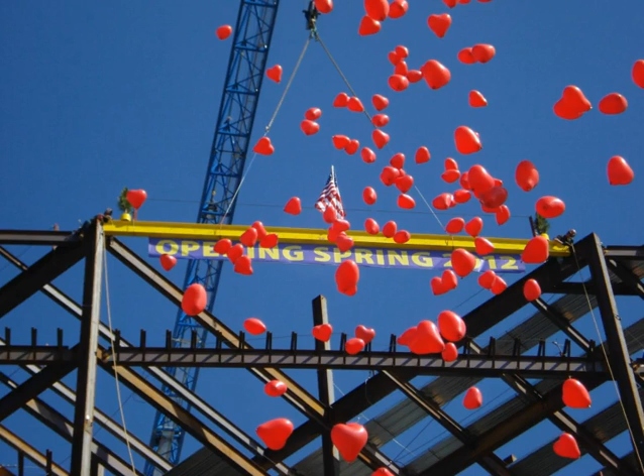This information is vital to your health and safety and to the health and safety of those around you. Robbins & Morton's culture is based on the philosophy that all injuries are preventable and that performing work safely at every project, every day, is key to our long-term success as an organization.

We have a simple goal. We want you to go home every day feeling as fit and as healthy as you did when you came to work, free from injury and illness. Your loved ones are counting on this too, and we don't want to disappoint them.

Robbins & Morton's vision for safety excellence is to provide a safe and healthy work environment for all who are touched by our business, and a culture of safety commitment to each other.

If you ask 100 people what's safety, you will likely get at least that many answers. The goal for Robbins & Morton is to bring everyone to the point of making a personal choice to work safe, because no one comes to work thinking, I'm going to get hurt today.

We don't want you to be safe because you'll get into trouble if you're not. We want you to be safe because it's the right thing to do.

The purpose of this orientation is to set and communicate goals, share the expectations for working on site, share your responsibilities for working on site, discuss the Robbins & Morton culture of safety, review common construction safety hazards and appropriate controls, and help with any questions you may have.

Safety is a value, and that means it won't change. Our commitment to you is that no schedule, profit, or quality issue will take precedence over your safety. You are important.

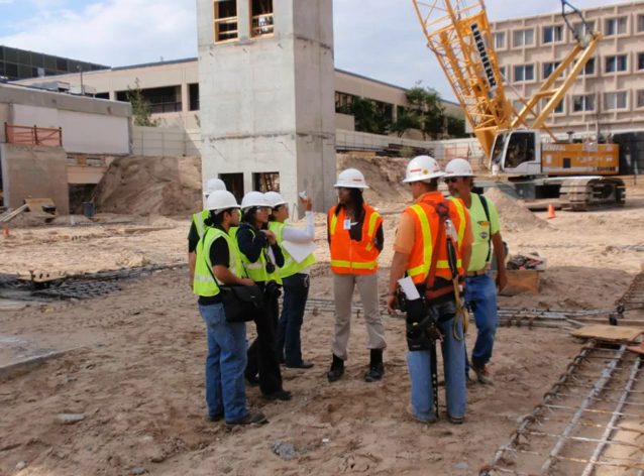Robbins & Morton is committed to maintaining a work environment that is free of harassment. In keeping with this commitment, we will not tolerate harassment of company employees by anyone, including any supervisor, coworker, vendor, supplier, client, or customer of the company.

A few things fair accountability does: it ensures accountability is balanced, ensures there is a consistent, impartial approach, helps make transparent or fair analysis, and encourages coaching and honesty.

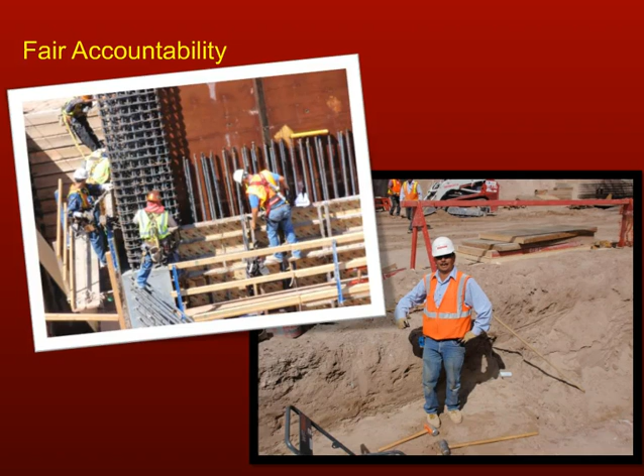Access to the project will be strictly controlled to ensure only those with required training are allowed on site.

12 Seconds to Safety is a safety awareness campaign to further supplement our current pre-task planning process that involves mentally preparing to start a task by asking yourself 12 simple safety questions.

This is not a substitute for a pre-task planning meeting required to be completed for each task. For all Robbins & Morton employees, this process must be completed for each task. Before each task, take a step back and mentally think through the 12 questions on the back of the card.

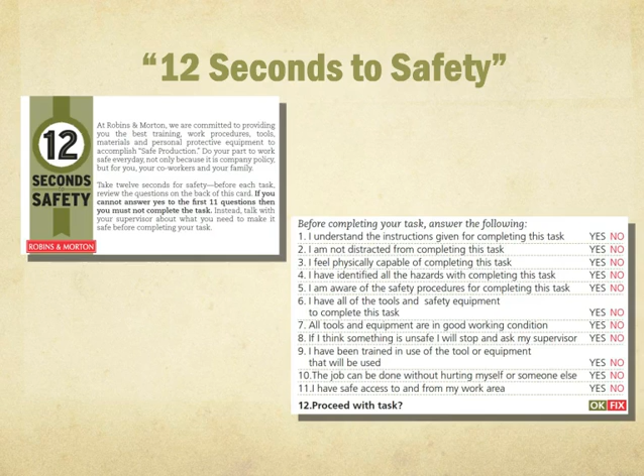Employees who can answer yes to all the questions are adequately prepared to safely complete their assigned task. Employees who answer no or who are unsure about a question must not start the task and should ask their supervisor for further assistance. The purpose of the 12 Seconds to Safety is to encourage employees to think in ways that activate and support safe behavior.

It encourages employees to coach themselves and their coworkers to identify unsafe conditions and exposures, and encourages self-accountability by having employees think about their actions and safety before they start a task.

Minimum PPE requirements are a hard hat worn properly, eye protection, leather or equivalent work boot, 4-inch sleeve t-shirt, work pants, hand protection, and your company's rules dictate if they are more stringent.

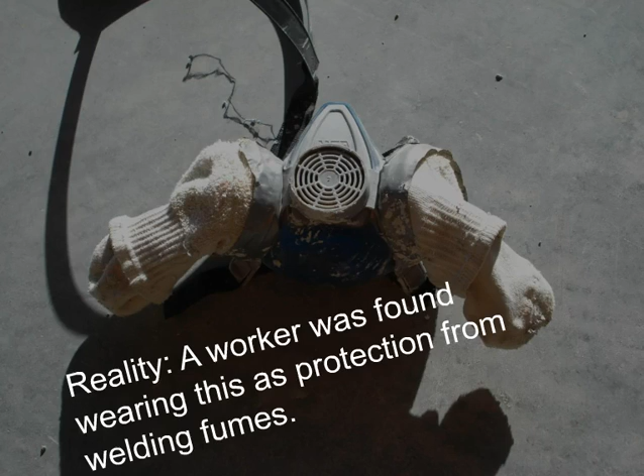Other PPE may be needed: fall protection at or above 6 feet, hearing protection above 85 decibels, respiratory protection, chemical protection, additional eye protection, or reflective vest. Head protection is required throughout the project for everyone.

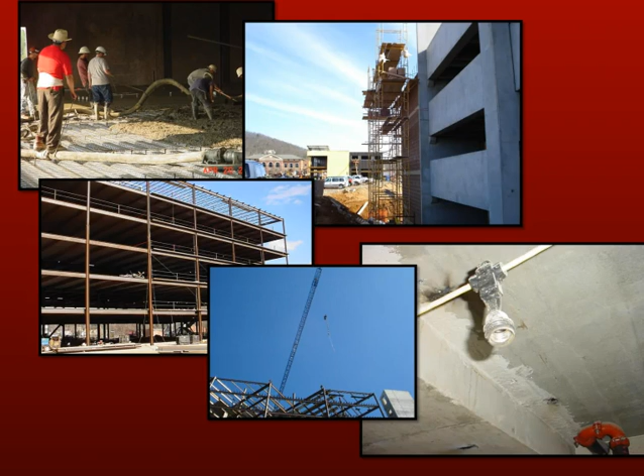Some additional hazards that could cause requirement for head protection are falling objects, overhead work, impact as a result of bumping or striking, electrical work, or flying or swinging debris or objects.

Approved head protection includes both plastic and fiberglass hard hats meeting ANSI Z89.1 standards for Class 2 and 1 only. Metal and cowboy hard hats are not approved. Head protection should be inspected daily for signs of damage and removed from service if found.

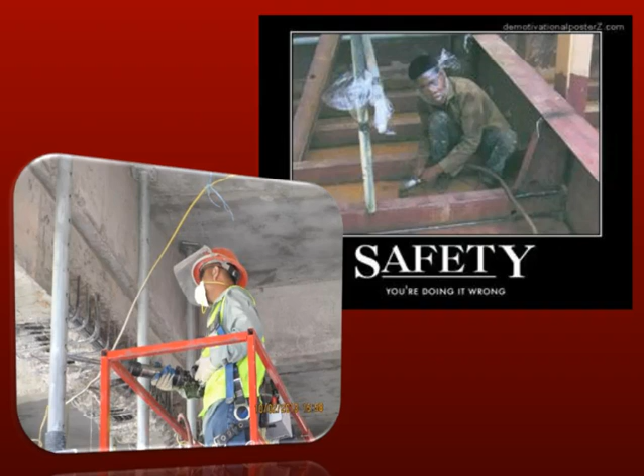Some hazards requiring eye or face protection are grinding, sawing, using power tools, high wind areas, mixing materials, splash hazards, cutting, drilling, overhead demo, or wrecking or stripping forms.

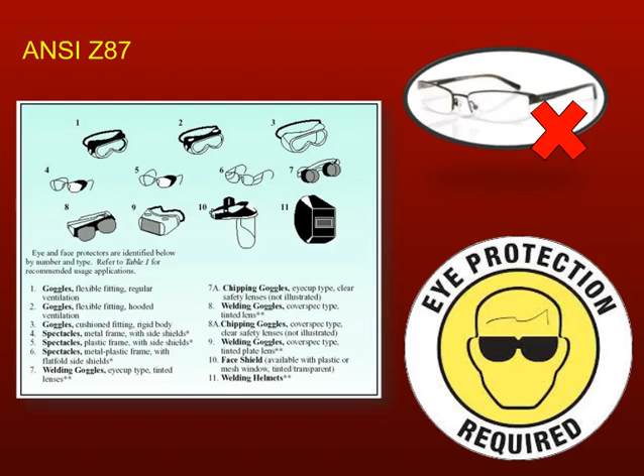Ordinary prescription glasses do not provide the required protection. Proper choices include rated glasses with side shields, rated over glasses, rated goggles with corrective lenses. Face shields are used with safety glasses and must be worn when there is exposure to the face.

If materials jam or get hung up, stop the machine and free the machine under direction of your supervisor. Do not try to catch falling materials. Ensure you provide a good workstation. Never put yourself in the line of fire. Use clamps, vices, or similar means to secure materials.

Avoid handling sharp materials. When it is not possible to reduce the noise or duration, hearing protection must be provided and adequate for the exposure.

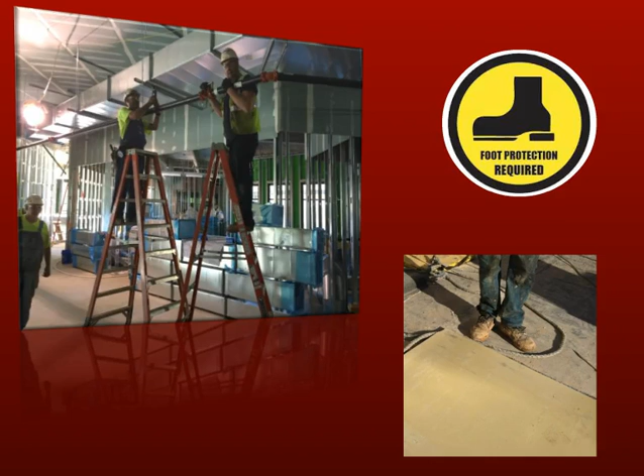Leather or equivalent work boots are required for all workers on this project. Be mindful of hazards when using equipment such as jumping jack tamps, remote-controlled roller compactor, or rigger.

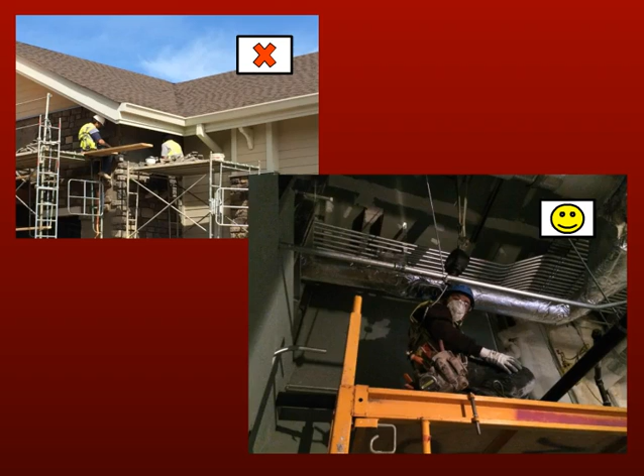Robins & Morton and subcontractors shall comply with the Occupational Safety and Health Administration standards, also known as OSHA, for construction as it relates to fall protection. Exceptions will not be permitted on this project.

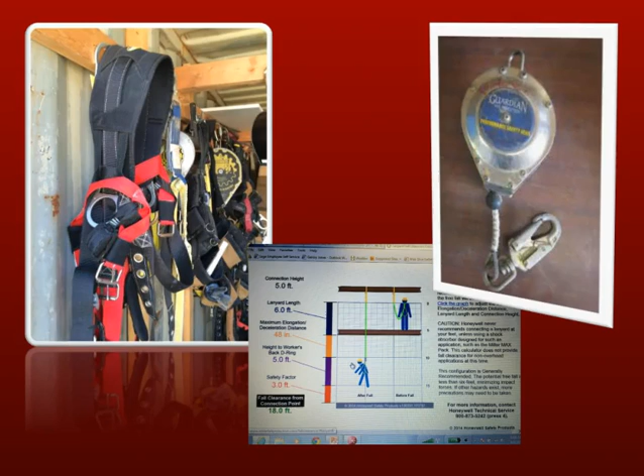Any employee exposed to a fall of 6 feet or more must be protected from falls by guardrails, safety nets, or by means of personal fall protection systems. Anchor points must be rated for 5,000 pounds. Consider potential fall distances. 100% tie-off will be used anytime installed fall protection is removed or disabled.

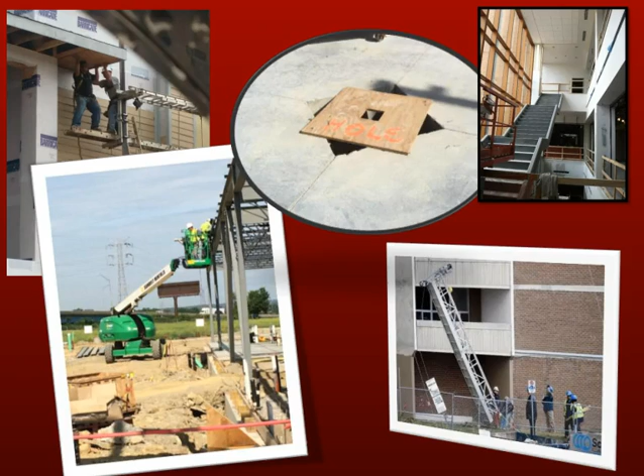Examples of work possibly requiring fall protection are suspended scaffolds, elevated formwork, material hoist flat roof, leading edge work, open-sided floors, work above dangerous equipment, unprotected floor holes, steel erection, or precast erection.

If you identify a loose or missing guardrail, contact someone who can have it corrected immediately.

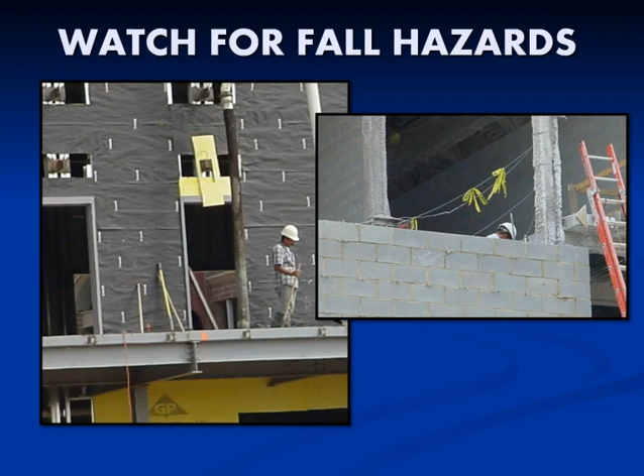Fall protection may consist of one of the following: guardrail systems, safety net systems, personal fall arrest systems, or warning line systems. All fall protection must be positive in nature, meaning there must be physical means to prevent an individual from falling. There is a presumption that providing a conventional fall protection system for employees is feasible and will not create a greater hazard, largely attributable to the advances and prevalence of specialized fall protection equipment on the market today.

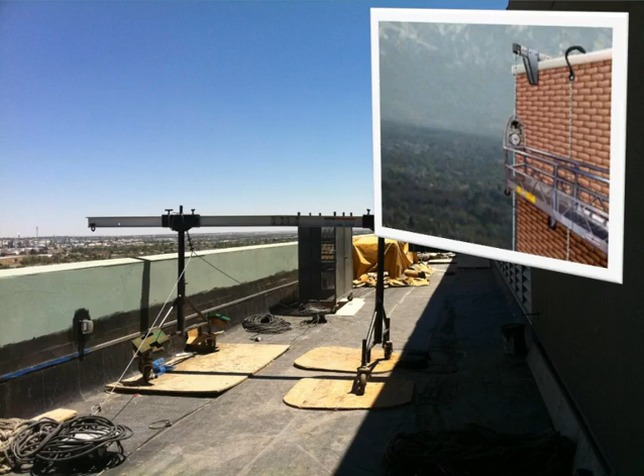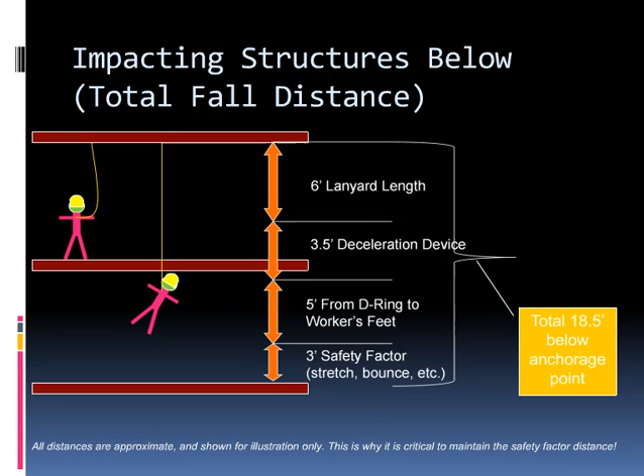Personal anchorage must be independent of any anchorage being used to support or suspend platforms and must be capable of supporting 5,000 pounds. Your competent person should evaluate your work and choose the correct fall protection system to protect you from falls. Fall protection should be designed to keep you from falling more than 6 feet and keep you from falling onto anything that might cause you injury or harm.

All operators must be properly trained. All workers on boom lifts must be secured using a device adequate to arrest a fall or restrain the worker. Your competent person should choose your equipment. In addition to typical requirements, Robins & Morton has best practices that will be used on site.

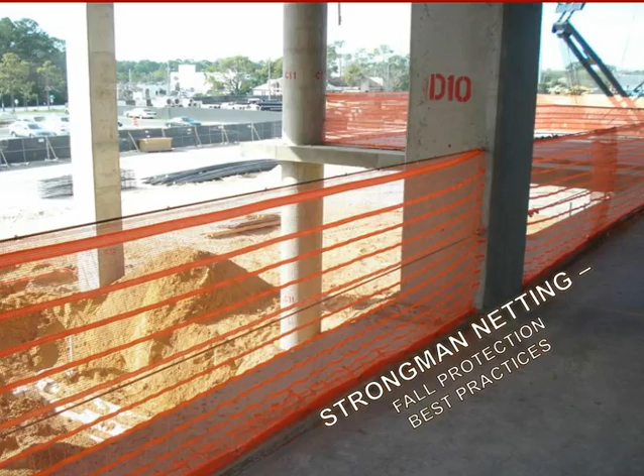There should always be an approved barrier between you and any fall hazards. If employees are required to go beyond warning lines, they must be tied off 100% of the time.

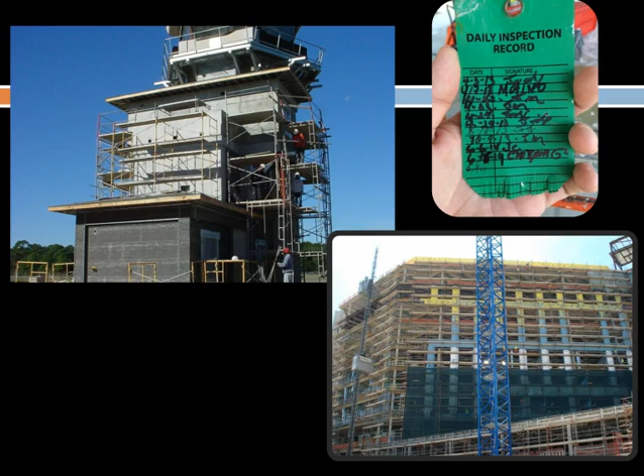All scaffolds must be designed, erected, and disassembled under the supervision of a competent person. All scaffolds shall be inspected by the competent person daily, prior to use, and after any changes. Scaffold platforms will be completely decked at all working levels. Ladder access will be provided.

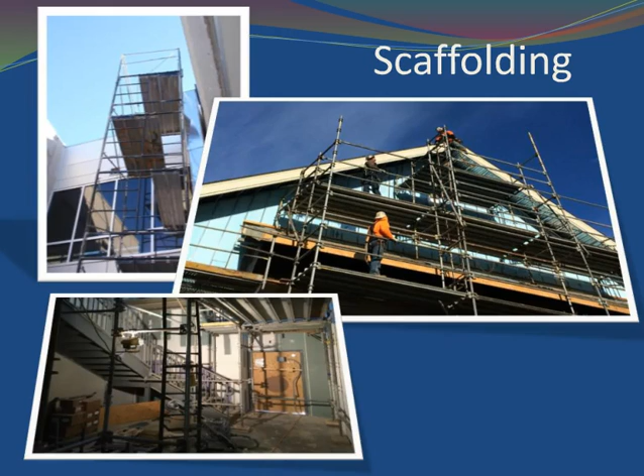Rolling scaffold height shall not be more than 4 times the scaffold's width, or by manufacturer recommendations. Never ride a rolling scaffold.

All trenches and excavations shall be inspected daily, prior to use and after any potential changes. No employee shall enter a trench without the competent person's approval.

Trenches or excavations greater than 4 feet deep require a method of access and egress. Trenches shall have sufficient ladders to ensure all travel distances to a ladder are less than 25 feet. All trenches or excavations 5 feet deep or more require sloping, shoring, or shielding.

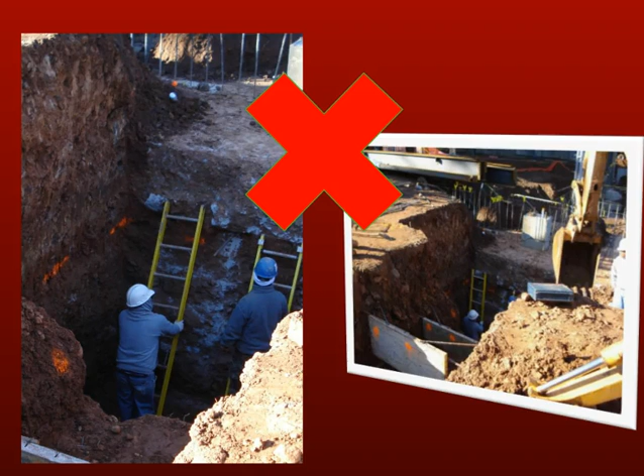If soil is not visually and manually classified, it must be treated as Type C soil. All soil shall be kept 2 feet back from the edge of the excavation trench. Always follow the manufacturer rules for any protective system.

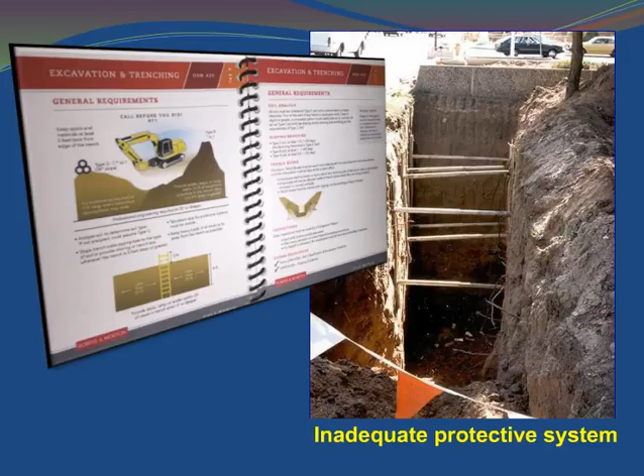Here's an example of an excavation with inadequate support posts and egress access. In this example, the worker went into the hole to clean out spalling materials. Basically, the hole was caving in.

Using hydraulic jacks, the operator can easily drop the system into the hole. Once in place, hydraulic pressure is increased to keep the forms in place. Trench pins are installed in case of hydraulic failure.

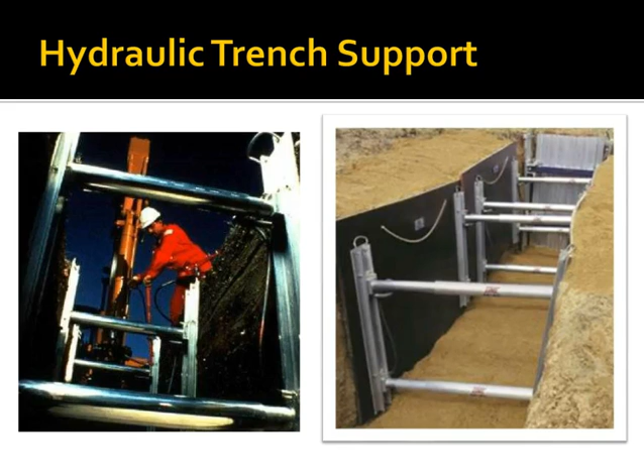Only qualified electricians will perform work on electrical lines, circuits, or equipment. Extension and tool cords must be inspected prior to each use. All temporary power outlets will be equipped with GFCIs. When plugging into permanent power, a GFCI adapter must be used and shall be provided by the subcontractor.

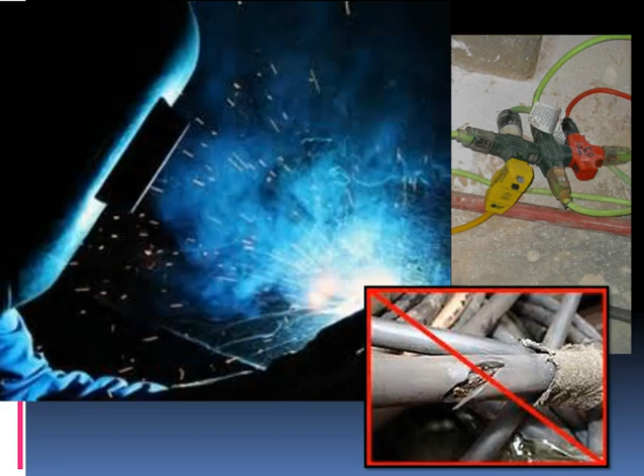Welding leads and cords will be hung using insulated wire or equivalent. Keep welding leads off guardrails and stair rails.

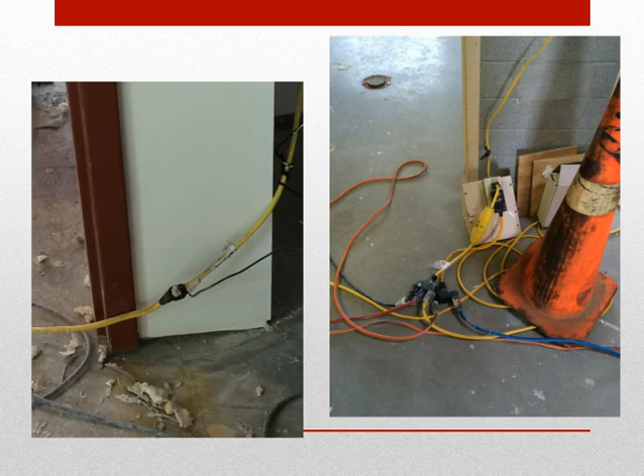No exposed conductors. Some examples to help keep exits clear of cords are to run cords overhead, run cords around the perimeter, tape cords down or use cord covers, or use cones for short duration use of extension cord, 5 minutes or less. All cords must be stored and put away after use. Temporary wiring must be installed to facilitate proper cord management.

Never run a cord through water.

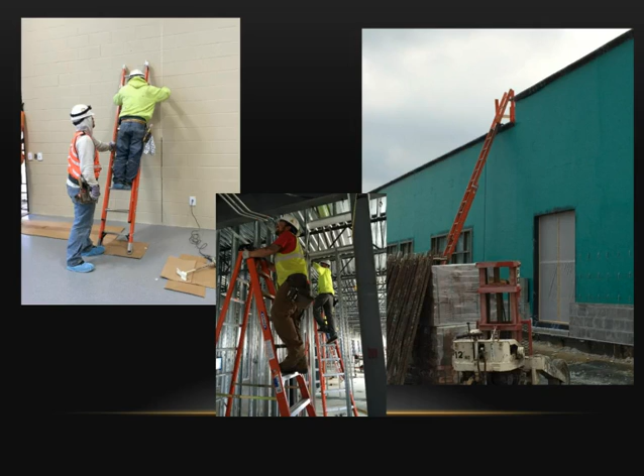All ladders must be OSHA approved and meet construction standards type 1 or 1A. All ladders must be in accordance with manufacturer's guidelines. Step ladders must be fully opened and locked. Do not use the top or top step of the ladder. Extension ladders may not be separated. Ladders must extend 36 inches above the landing point.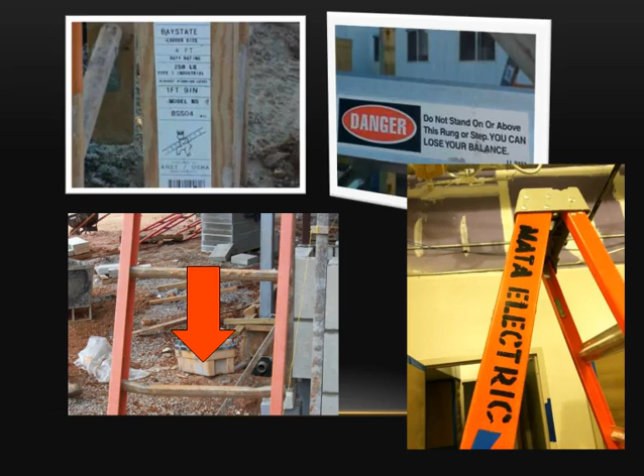Aluminum or metal ladders of any type are not allowed on site. Ladders should be clearly marked with the company name and must be inspected prior to each use. Damaged ladders must not be used. All ladder users must be properly trained. Ladder types will be determined by your competent person.

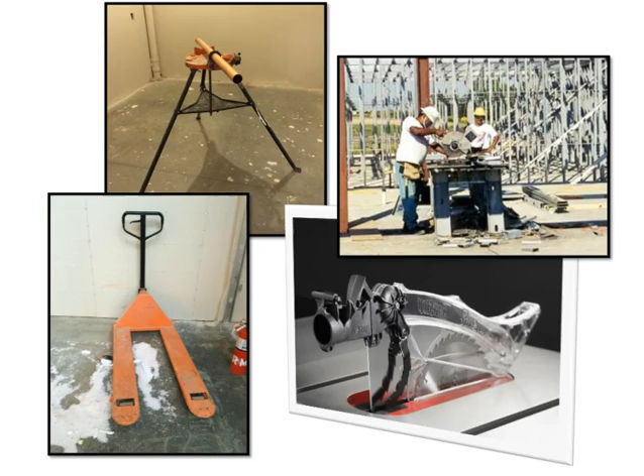Always ensure you maintain tools, use the right tool for the job, inspect your tools before use, operate according to the manufacturer's instructions, use PPE, and use guards.

For powder-actuated tools, the user must be trained and licensed to operate. Ensure you test the tool each day before loading to ensure the safety devices are working properly. Wear suitable ear, eye, and face protection. Select a powder level that will do the work without excessive force.

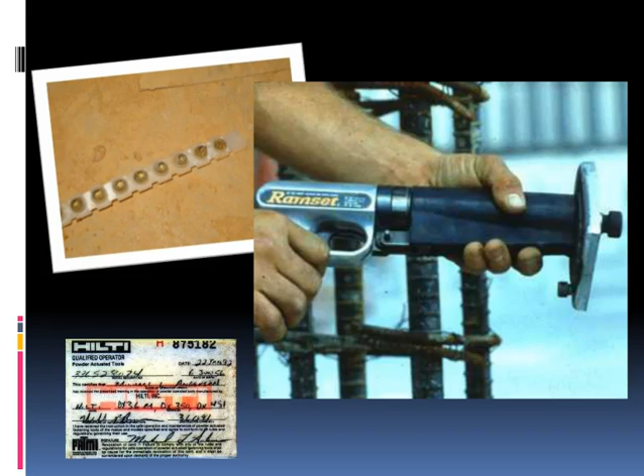Hazardous energy is any form of energy—electrical, pneumatic, thermal, hydraulic, gaseous, or gravity—that could potentially cause, through its release, personal injury or property damage.

Work on electrical components that requires lockout-tagout will be required on a case-by-case basis. Electricians will be the only ones allowed to work on live or de-energized equipment.

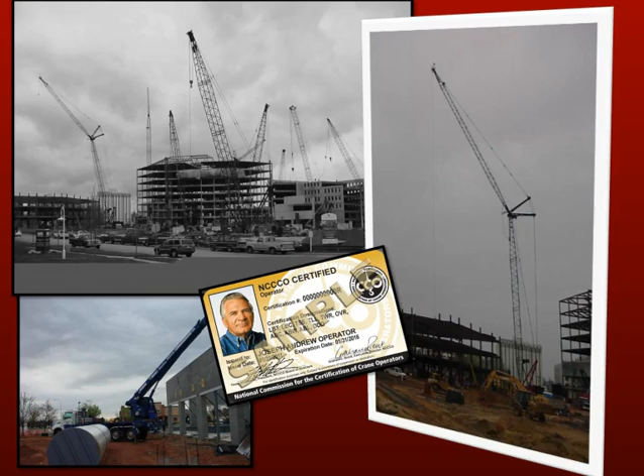Only NCCCO certified crane operators may operate any cranes on this site. A valid annual crane inspection report shall be provided to Robbins & Morton prior to any crane operations. Crane operators maintain full control over hoisting and must obey all operator manual requirements, including wind.

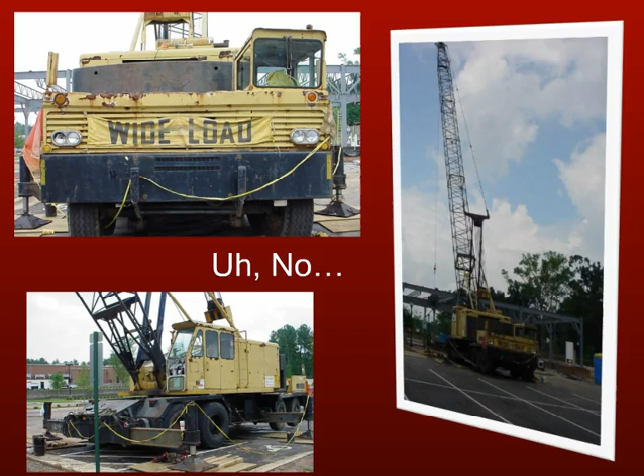Documented daily crane inspection must be performed and kept in the crane at all times. Cranes will not be brought on site without prior notification and approval. Robbins & Morton has very specific requirements for crane documentation. This process can take from days to weeks to accomplish.

Required crane documentation involves a third-party inspection, post-crane erection certification, post-crane delivery inspection from a third party, crane operator certification, qualified rigger certification, qualified signal person certification, a 3D lift plan with mat cribbing details, a critical lift plan if applicable, and rigging inventory.

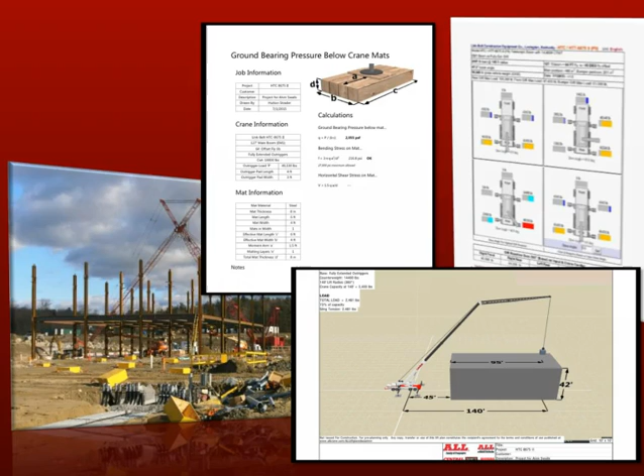The crane inspection is not a sticker on the window. It is a written pass-fail document that lists the items inspected, all discrepancies, corrections, dates corrected, and is performed by a third party only. Only qualified riggers shall rig loads.

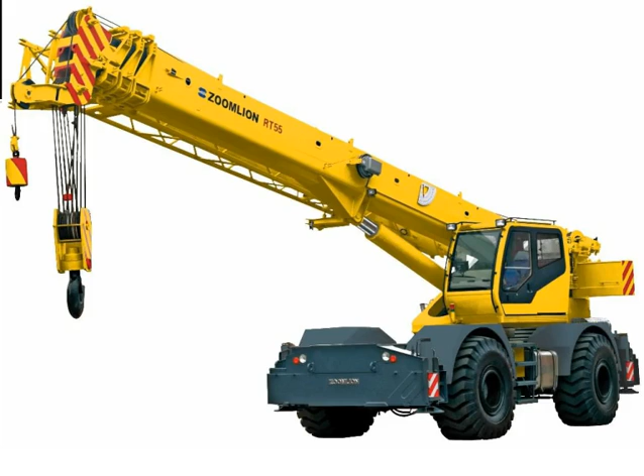All rigging equipment shall be inspected daily and prior to any lift. Loads shall not be lifted over personnel.

Crane operators and signalmen shall utilize horns or whistles to warn of an impending lift. 100% use of taglines unless greater hazard. Safety latches are required on all hooks.

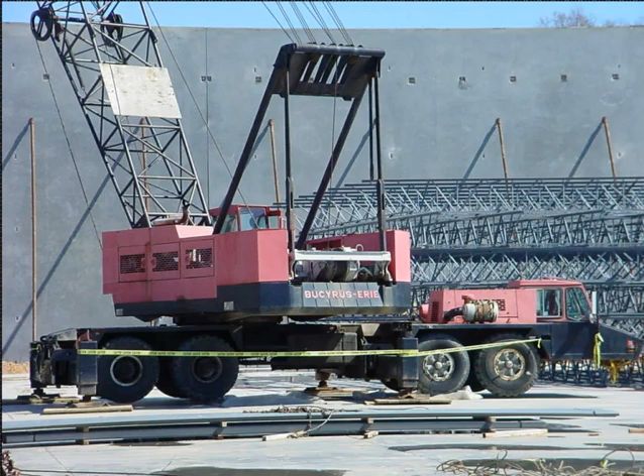Always stay out of the swing radius of the crane. Make sure there are guard barriers showing the swing radius.

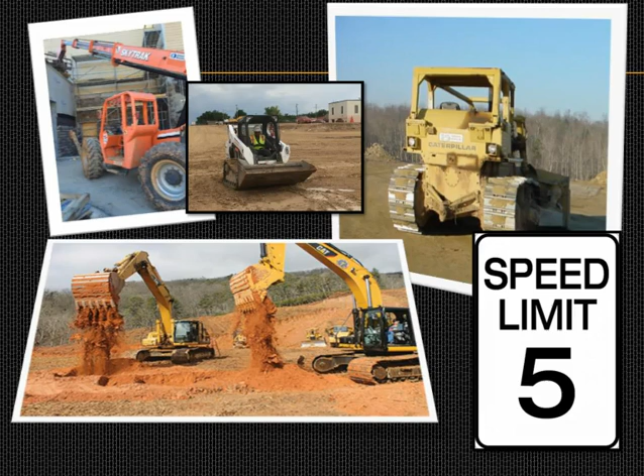Only trained or authorized employees may operate vehicles and equipment. Use of seatbelts is required. Mobile equipment with a restricted rear view must have a working backup alarm and/or a spotter. Never back up without looking. For workers on the ground, always make eye contact with the operator and signal your intention before approaching the equipment.

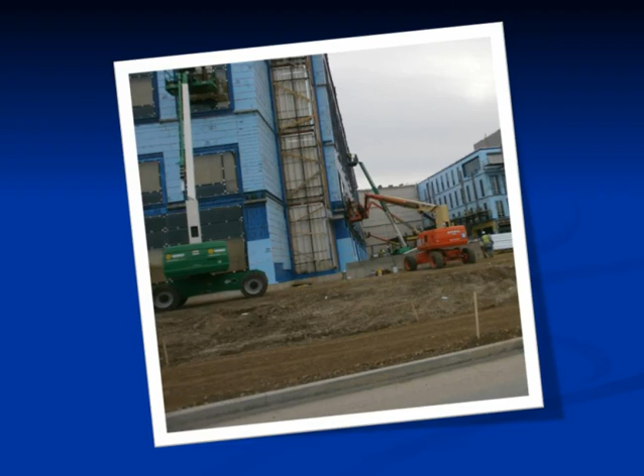Ensure you always watch out for equipment and know what's above you when coming out of the building.

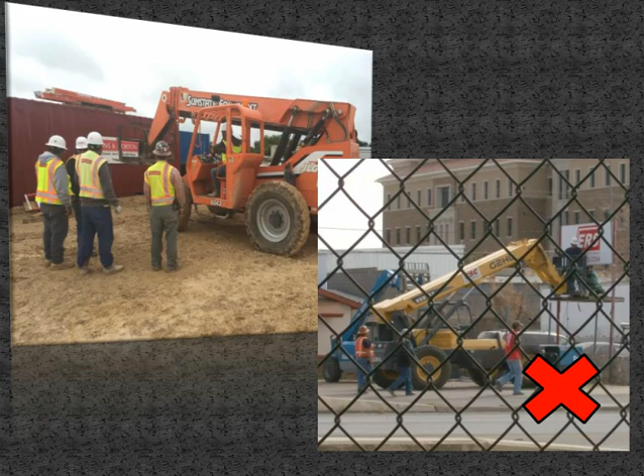No one is permitted to operate a forklift unless they have received forklift training and have been evaluated using the lift. Training is only good for 3 years.

Hot work is defined as any activity that produces excessive heat, exposed heater coils, open flame, or sparks. The area around and below the hot work must be cleared of all flammables and combustibles. All items that cannot be removed must be covered with fire blankets. All floor and wall openings must be protected. A fully charged, inspected ABC fire extinguisher must be located adjacent to the hot work operation. Any fire or discharge of a fire extinguisher must be reported immediately to Robins & Morton Safety Manager. Failure to do so will result in disciplinary action.

Should you need to use an extinguisher on site, please remember the following: pull the pin from the extinguisher, aim the hose at the base of the fire, squeeze the trigger, and sweep the extinguishing media back and forth at the base of the fire. Report all extinguisher use to your supervisor.

You should provide your own task-specific fire extinguisher. The building's fire extinguishers are for the building.

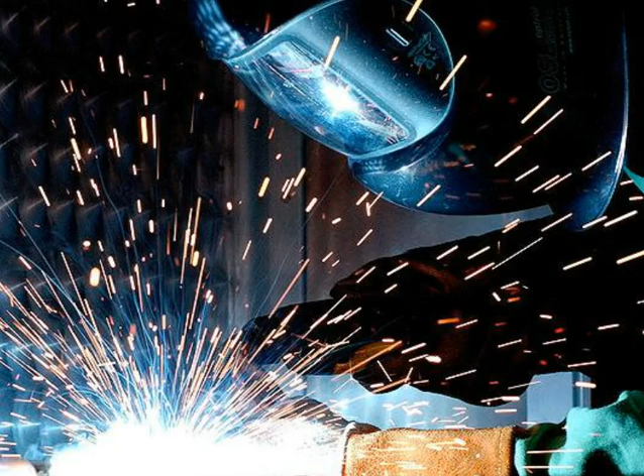All hazardous materials on site shall have an SDS on file at the site. SDS logs will be maintained by both R&M and subcontractors. SDS locations shall be made known and available to all employees and at centralized locations. The appropriate MSDS should be reviewed prior to the handling of new hazardous materials.

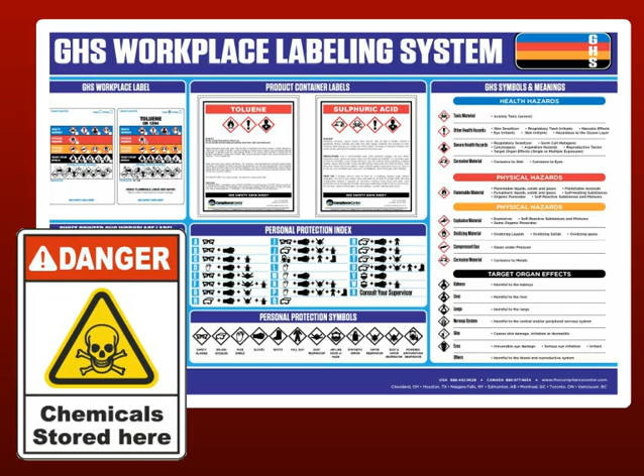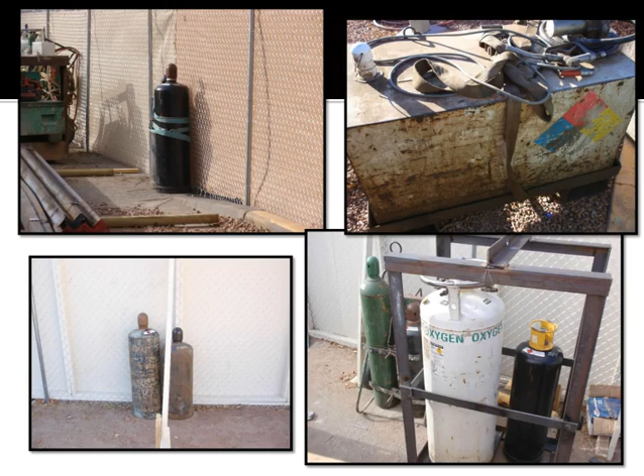All hazardous materials, including flammable and combustible materials, must be properly labeled and stored in an appropriate container or locker. All containers used to store any material must be appropriately labeled. All chemicals and equipment containing chemicals must be stored in approved areas. Contractors are responsible for removing all unused chemicals from the project site at the completion of their project.

Compressed gas cylinders will be secured at all times. All dedicated chemical storage areas for contractors must have safety data sheets available at the storage location. If you are unsure of appropriate storage areas, please contact Robins & Morton for further direction.

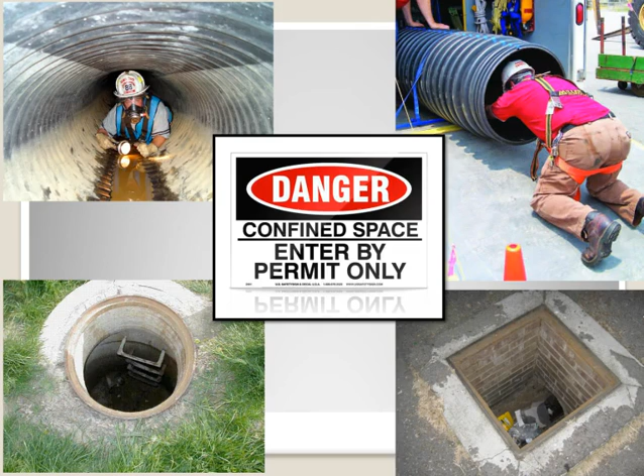A confined space is defined as a space that is large enough and so configured that an employee can bodily enter it. It has limited or restricted means for entry and exit and is not designated for continuous employee occupancy.

Robbins & Morton must be notified 24 hours in advance of any confined space entry. Entry into a confined space may require locking and tagging of equipment, process lines, or electrical components. All workers required to enter, attend, or supervise a confined space entry must be trained in accordance with 29 CFR 1926.1200 per project requirements. Before you lift, please consider the following: weight, size, shape, and path of travel.

Ensure you bend your knees, lift with your legs, and keep your feet pointed at the load. Avoid twisting. Ask someone for help if needed. Do not attempt to lift beyond your strength. If the load is too heavy or awkward, ask for help. Never lift more than 50 pounds unassisted.

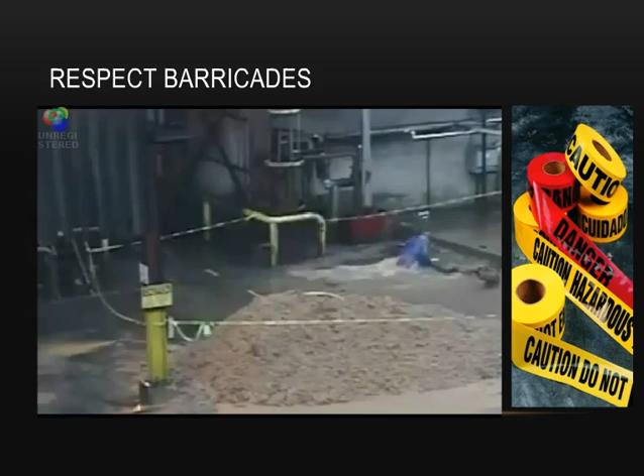Employees must read and adhere to all warning signs, decals, and barricades. Red danger barricade tape is used when there is a potentially life-threatening situation and shall not be crossed. Yellow caution barricade tape is used in areas where a non-life-threatening hazard exists. Caution tape may be crossed once an employee has assessed the danger and can enter without injury. All barricades and signage shall be removed once the activities are complete.

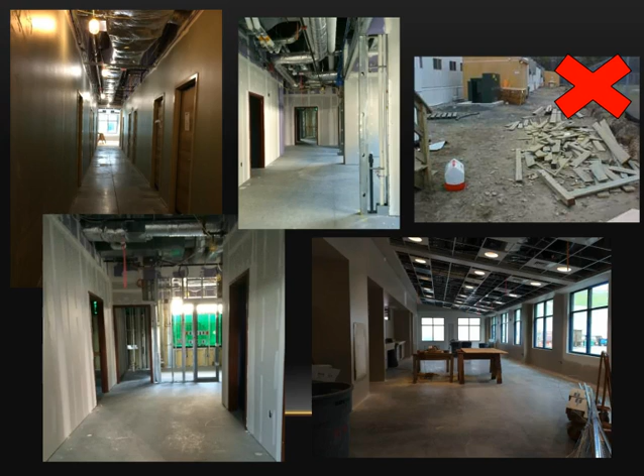Work areas must be kept clear and free of obstructions by material or debris. Clean-as-you-go practices are required and are contractual obligations. Materials will not be stored in a manner that will block, restrict, impede, or prevent access to an egress path or emergency equipment. Stairways shall not be used as storage areas.

All accidents and incidents must be reported to your foreman and the Robbins and Morton safety manager immediately. This includes near misses, injury or damage caused by construction or non-construction events, injury or damage to the general public, or on-the-job injury but medical attention waived.

Subcontractors will be responsible to provide an incident investigation to Robbins and Morton within 24 hours of the incident. All accidents involving medical attention will require that the injured party submit a sample for drug and alcohol screening. A root cause analysis will be conducted for incidents by the project team, and the causes and corrective measures shared with the project participants. You could be the reason the next injury doesn't happen.

One of the greatest errors in incident analysis is believing the work happens just as planned. Effective incident analysis follows the work as it actually happened, not the imaginary straight line. The straight line is never where the work happens.

Sources of error are usually system-induced, not personal. To understand human error, you have to stop looking for people's personal shortcomings. Saying what people did or did not do, or what they should have done, does not explain why they did what they did. Why did their actions make sense at the time?

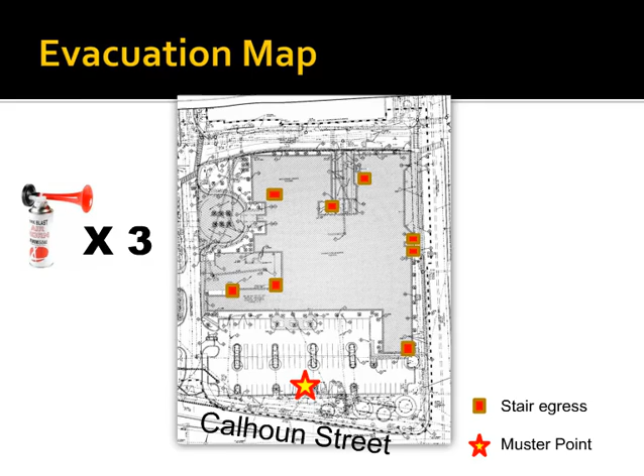Each contractor is required to have first aid and CPR trained personnel on site. Each contractor should have a local urgent care facility for worker treatment in the event of an injury. All injuries should be reported to Robbins and Morton's safety manager as soon as possible. Injuries not requiring treatment will still be documented.

Access Care is a first call nursing triage service Robbins and Morton has partnered with to provide you with immediate access to a healthcare professional should you become injured while working on the job. Access Care nurses will work with our employees to provide immediate first aid advice, evaluate the necessity of medical treatment beyond on-site first aid, and help guide employees through the process of treatment, transitional duty, and return to work in a manner that eliminates the uncertainty of recovery.

Access Care's injury evaluation, first aid instructions, and follow-up should reassure the employee that this course of care is the appropriate course of care. Pre-task meetings will be held to discuss project tasks, the hazards associated, and how we will eliminate the hazard. These will be completed, kept on site, and checked periodically by Robbins and Morton.

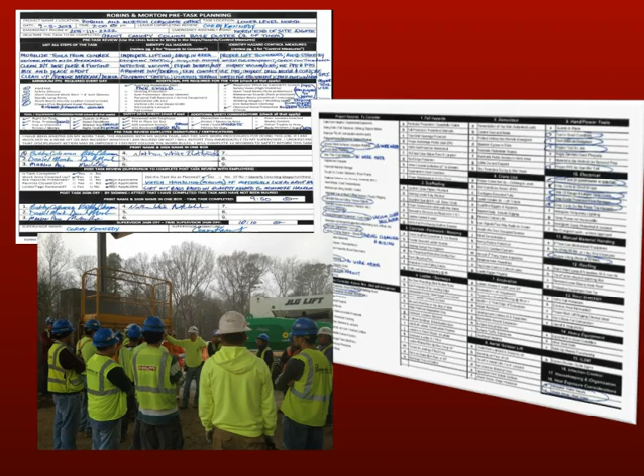A site-wide safety meeting will be conducted by Robbins and Morton each week to discuss relevant safety topics. Each subcontractor will also hold a weekly safety meeting with their team.

On site, we will perform work in the rain, but we never have to work in lightning. Count the seconds between seeing lightning and hearing thunder. If this time is less than 30 seconds, lightning is still a potential threat. Seek shelter immediately. We know that was a lot of information, but let's put it into practice.

Come to the project. See what we're talking about for yourself. We hope through this presentation you are able to catch even some of the excitement that we feel for this project. Come on, let's do this.

You'll have to do your part though. Let us know what works, and as important, what doesn't. It's your project. Make it work for you and for Charleston.